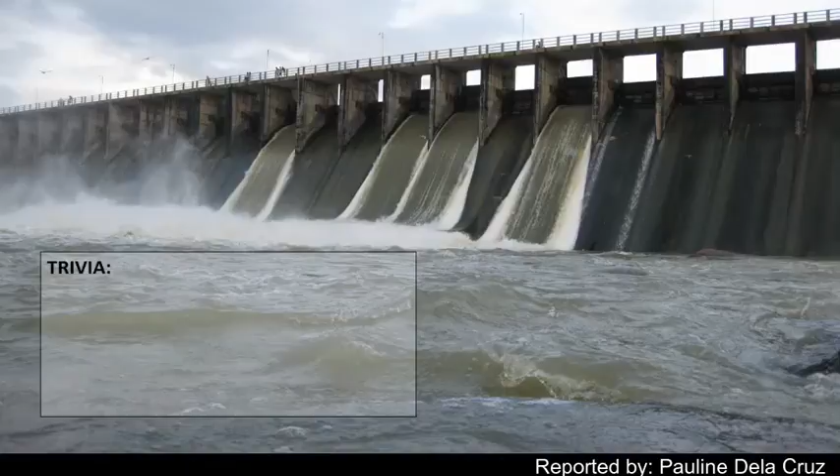First is, sabi dyan, the ancient Egyptians built the first known dam to exist. Yung mga ancient Egyptians po, sila po yung kauna-unahang nakapagtayo ng dam sa buong mundo. Hindi naman po lingid sa ating kaalaman na sila talaga yung mga pasimuno pagtungkol sa mga constructions. Hindi pa man nauso yung mga architecture, yung mga engineers, meron na sila. Ito daw po ay nagawa, yung kauna-unahang dam, around 2,950 to 2,750 BC.

Pangalawa po is the Philippines have 15 large dams, according po iyan sa the International Journal on Hydropower and Dams. So meron po daw tayong 15 large dams dito sa Pilipinas. At ang last trivia natin is, one of the largest dams in the Philippines is the Magat Dam. Itong Magat Dam is located dito sa Luzon, somewhere in Isabela sa Cagayan Valley, Region 2 siya.

So dako na tayo sa kung ano nga ba ang dam o ano yung naitutulong nito sa atin. Dams are barriers usually constructed across a stream channel to impound water. Dams are typically provided with spillway systems to safely pass a broad range of flows over, around, or through the dam. Ibig sabihin, ang dam ay nakakatulong para mapigilan ng tuluyan ang pag-agos ng tubig. Kasi imagine, wala tayong dam, posible na lumubog yung mga karatig na lugar na talagang malapit sa dam. Kung iniisip natin na ang dam ay just a barrier na pumipigil sa pagbaha, hindi lamang iyan. Marami pang benefits tayong makukuha doon at mamaya maidi-discuss natin yan.

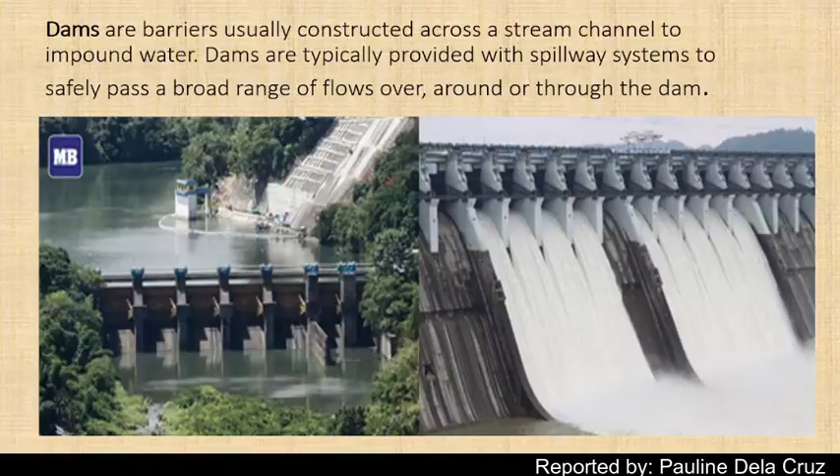Let us now discuss the uses of dams. First, we have irrigation. Major portion of water stored behind dams is withdrawn for irrigation. They are mainly used for crops, livestock, or plantations. Next, we have electrical generator. Water from dams can produce electricity. When the water is released through the dam, it spins the turbine that is connected to a generator that produces or generates electricity. Next, flood control or flood prevention.

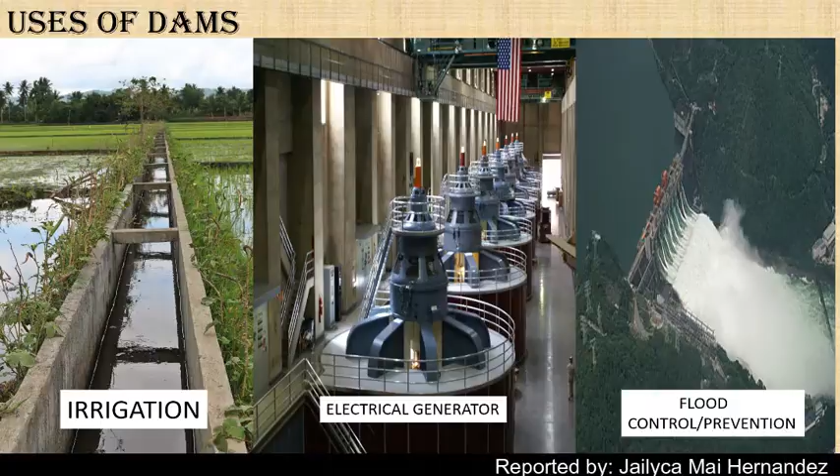Dams are made to protect against the potential loss of life and property that can be caused by flooding. Dams protect by collecting and holding water. But once they are collected, a dam might release the water back into the river at a controlled speed, or it may divert the water somewhere else for other uses. Next, we have water storage or water supply. Dams play an important role in the water supply for domestic, agricultural, industrial, and community use. Water that is stored in the dam can be used during dry season or during times of shortage.

Next, we have debris control. Dams provide enhanced environmental protection, such as the retention of hazardous materials and detrimental sedimentation.

Next, we have recreation. Dams are built for more than one purpose. Dams can also provide recreational activities, such as swimming, boating, and fishing.

Next, we have mine tailings. Tailing dams are used to store water and waste that come as byproducts from the mining process. It allows the mining and other processing of vital minerals while protecting the environment.

And lastly, navigation. Inland navigation refers to the transport of ships through inland waterways. There are various water conditions, such as changing rivers due to sedimentation and erosion. To overcome those kinds of problems, dams are built and they effectively serve the function of controlling the water level, as well as changing the course of waterways.

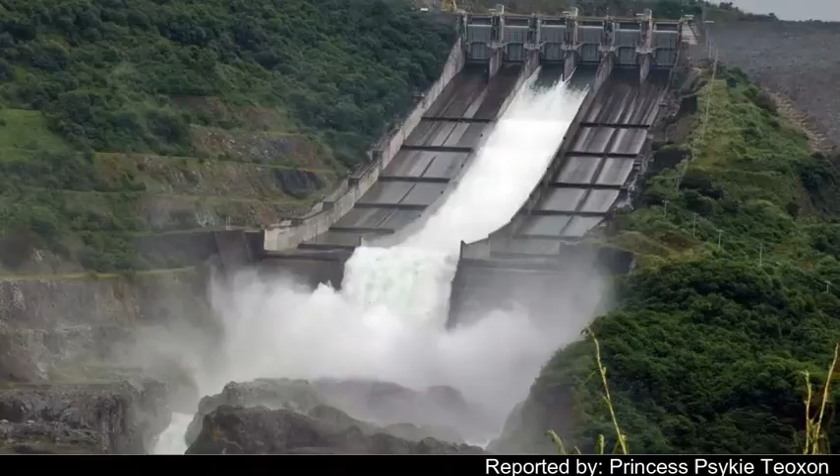Types of dams. We have by structural, by use, and other types. First, we discuss by structural.

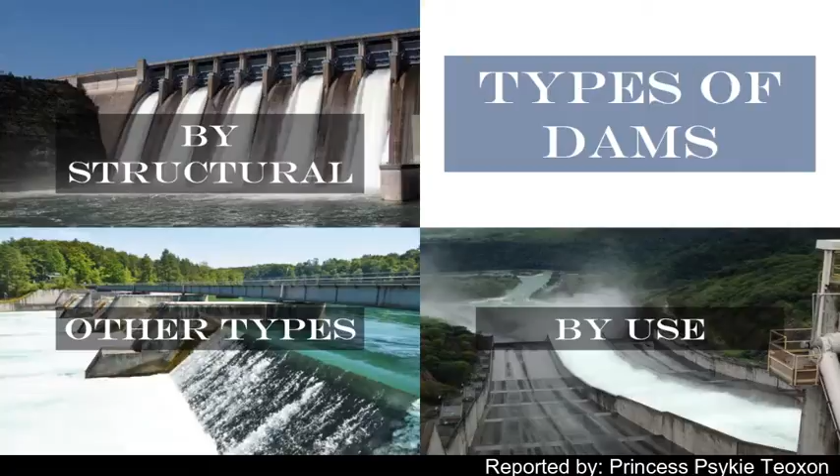Arch dam: a concrete or masonry dam which is curved upstream so as to transmit the major part of the water load to the abutments. It uses hydrostatic pressure to transfer the force of water to the foundation and abutments of the dam. The force of the water on the fill side pushes against the arch and the resulting resistance to bending transfers the loads to the abutments. Next, gravity dam.

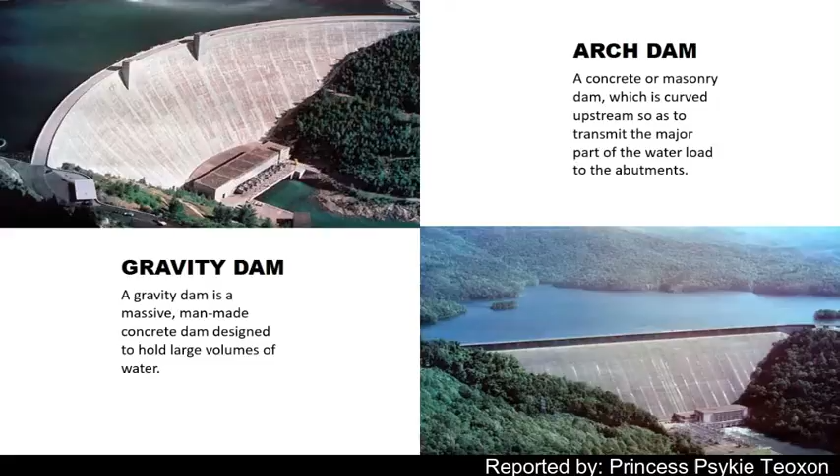A gravity dam is a massive man-made concrete dam designed to hold large volumes of water. Because of heavy concrete use, it is able to resist the horizontal thrust of the water, and gravity essentially holds the dam to the ground. They are used to block rivers in wide valleys and must be built on a strong foundation of bedrock.

Next, buttress dam. Buttress dams can take many forms, but they all consist of a sloping deck supported by intervals of buttresses. There are three main buttress dam types, including multiple arch type, massive head type, and deck type. Buttress dams usually use less concrete than other dams but are not necessarily cheaper.

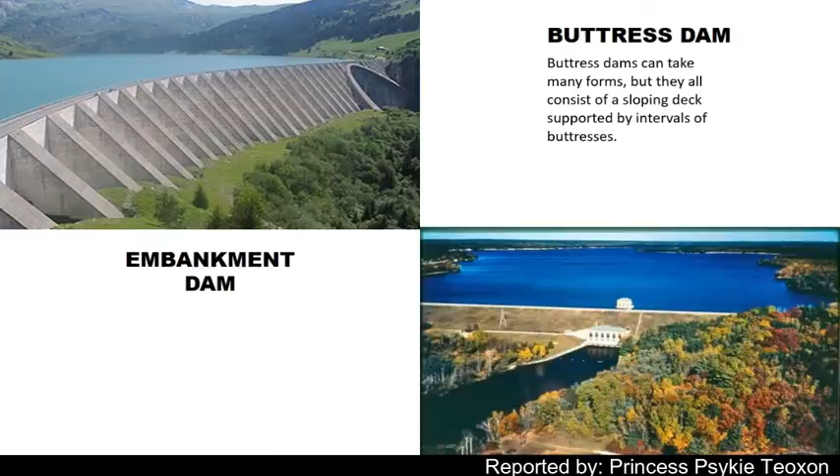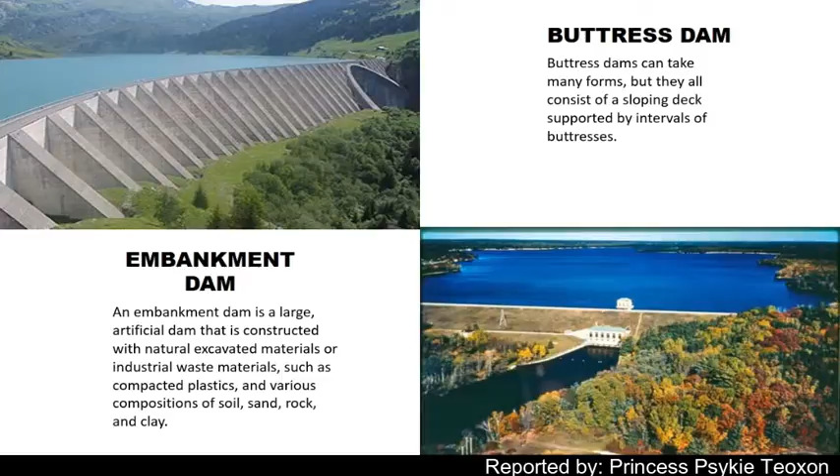Next, embankment dam. An embankment dam is a large artificial dam that is constructed with natural excavated materials or industrial waste materials, such as compacted plastics and various compositions of soil, sand, rock, and clay.

By use: saddle dam, a subsidiary dam of any type constructed across a saddle or low point of the perimeter of a reservoir.

Diversion dam. A diversion dam is used to divert water. They provide pressure to push water into ditches, canals, or other areas used for conveyance. Diversion dams are typically lower in height and have a small water storage area upstream.

Next, underground dam. Used to trap groundwater and store all or most of it below the surface for extended use in a localized area. In some cases, they are also built to prevent salt water from intruding into a freshwater aquifer.

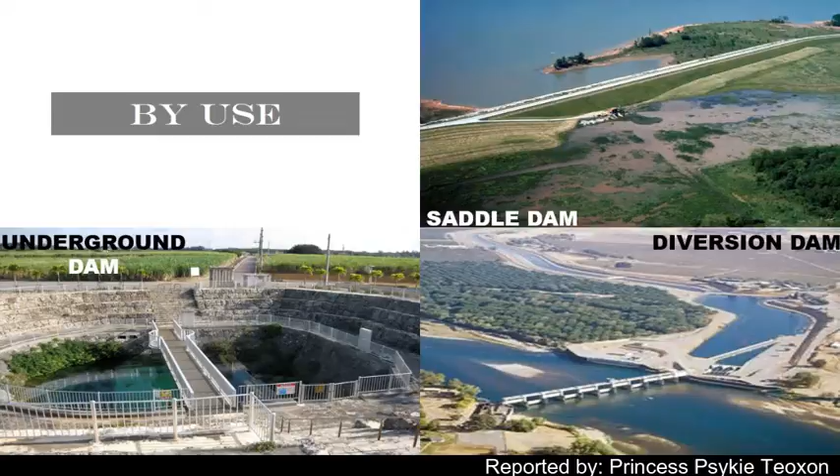Next, other types. First, cofferdam. A cofferdam is a temporary portable dam used for a variety of projects including bridge repair, shoreline restoration, pipeline installation, and many other construction projects.

Hydropower dam: a dam that uses the difference in water level between the reservoir pool elevation and the tailwater elevation to turn a turbine to generate electricity.

And last, industrial waste dam. An embankment dam usually built in stages to create storage for the disposal of waste products from an industrial process. The waste products are conveyed as fine material suspended in water to the reservoir impounded by the embankment.

So next, let's talk about how a hydropower dam works, even just the basic principle. First, we need water, the water reservoir, because of its potential energy. And that water will soon travel into a penstock, which is this—the steep passage of water going to the turbine.

Due to the force of water, the turbine will start to rotate the shaft that is connected to a generator, which is this, going to our generator. By this, mechanical energy will convert into electricity. And after gaining electricity, the current will travel into a transformer so that the voltage of the electricity can be raised, to maximize the energy we get.

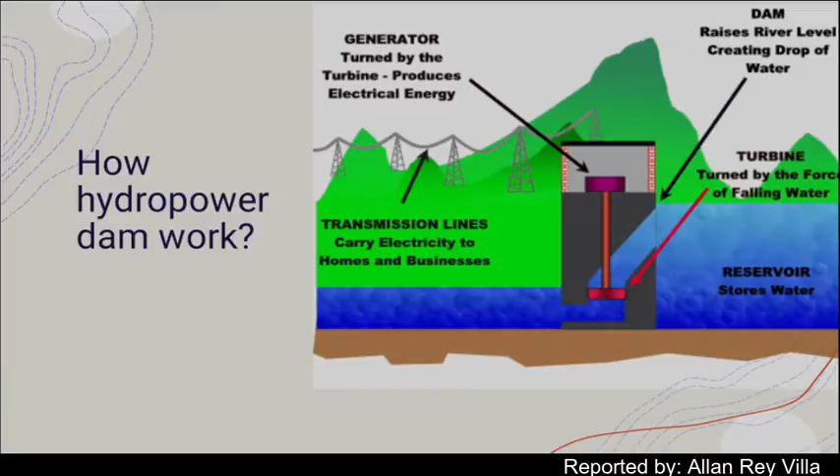And there we have it, that's the basic principle of a hydropower dam. We now have renewable energy ready to distribute into our community. Next, we'll talk about the structure of a dam.

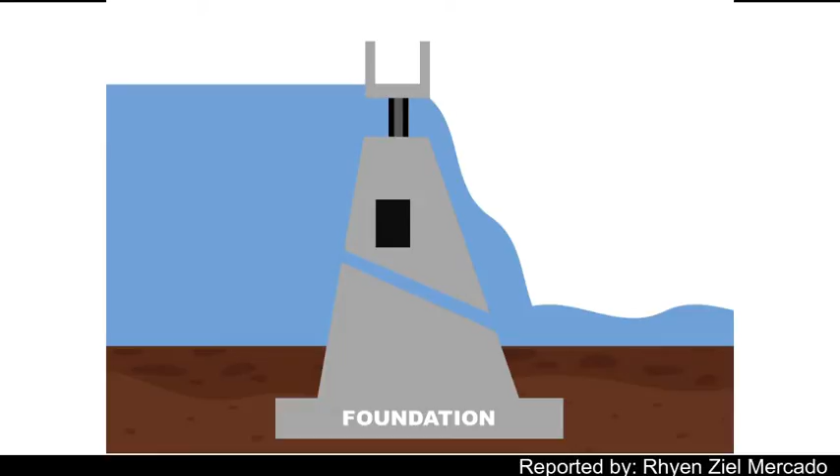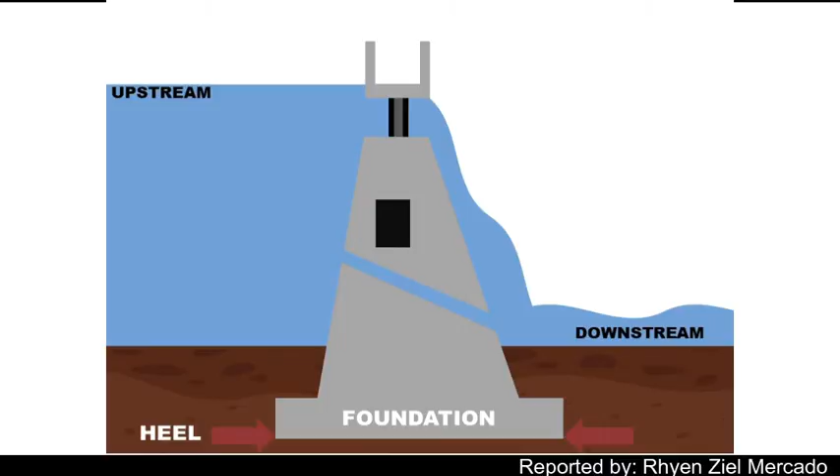As you can see on your screen, this is the cross-sectional view of a dam wherein this side is called the upstream side and this side is called the downstream side. At the foundation of the dam, there is a heel associated with the ground on the upstream side, and on its opposite side, associated with the ground on the downstream side, which is called the toe.

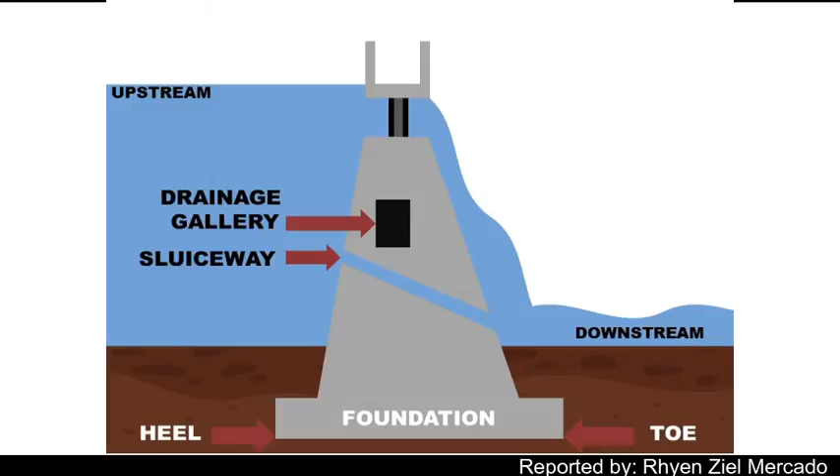The next one is the drainage gallery. This is a small room or pathway which has access into the interior of a dam.

Next is the spillway. Actually there are two types of spillway. In this view, you can see that this one is the principal spillway, and this is the main spillway. The other type is called the emergency spillway, which we'll see in the next slide.

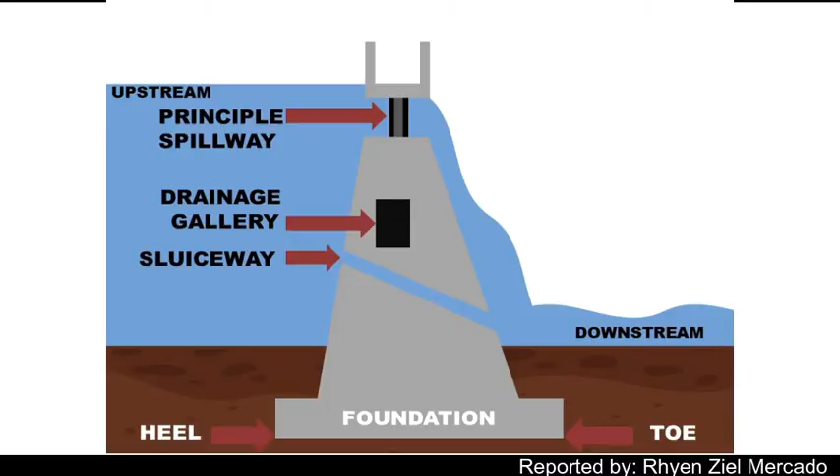The emergency spillway is S-shaped, forming a curve for the purpose of preventing the water from rushing out, which may damage the downstream area near the bottom of the dam.

Next is the crest. This one is located at the topmost of a dam, and this is the overflow part of a dam. Next is the parapet wall.

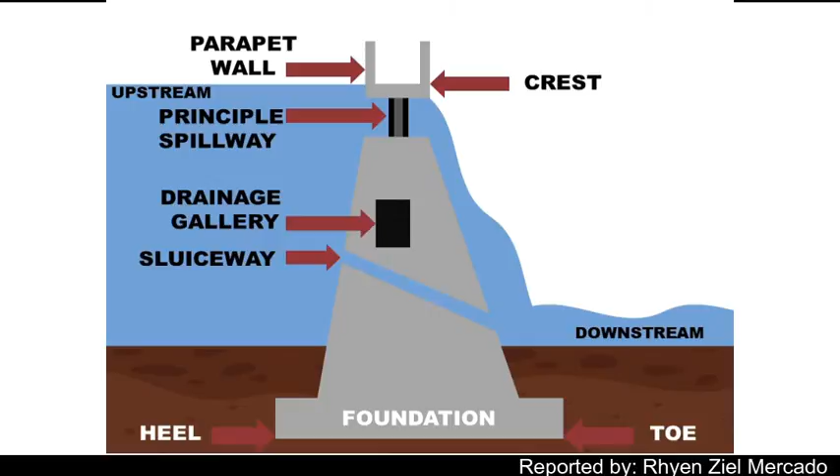This is built for the protection of the people. And next is the roadway, which is assigned for vehicles.

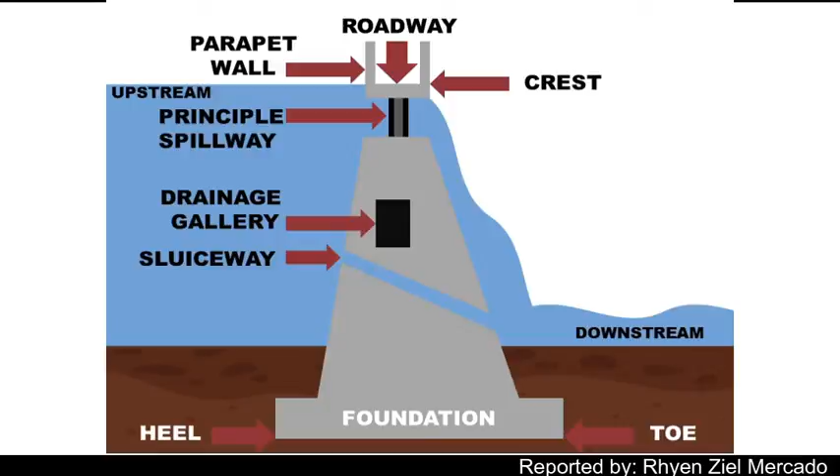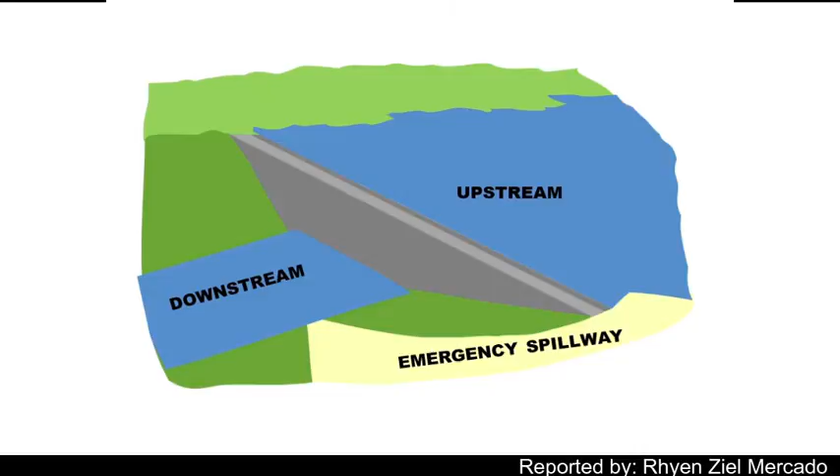In this view, you can see the upstream, downstream, and the emergency spillway discussed a while ago. There's also another part, which is the abutment. The abutment is where the dam rests, and it is located at the sides of the valley.

There are other parts of a dam that may not be visible on the images I've shown you. One of them is the appurtenances. These are some equipment in a dam such as gates, pipes, and others. And lastly, the powerhouse, where the generators are located.

So that's all for the structure of a dam. Thank you.

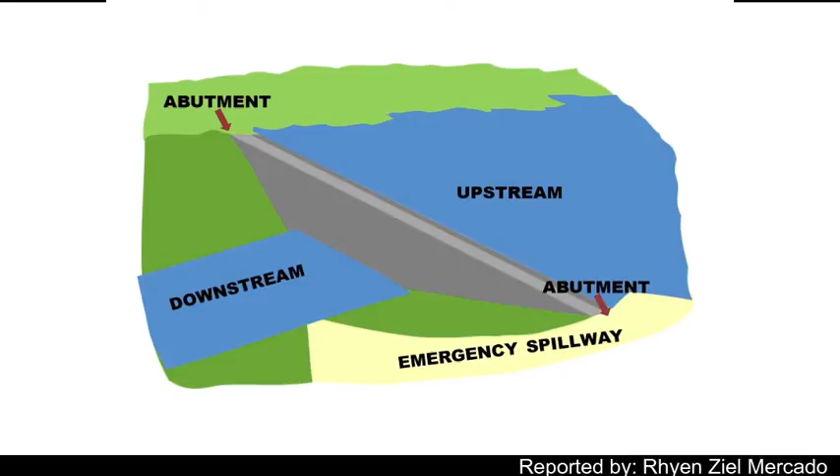The benefits of dams: dams provide hydroelectric power. Hydroelectric power is a renewable energy source that generates electricity in hydropower plants by using water stored in dams and flowing through rivers. The flowing water drives the blades of a turbine, which spins the generator, turning the turbine's mechanical energy into electrical energy. Hydroelectric power contributes to a large portion of global electricity generation.

Next, dams also provide better irrigation. A dam generates a reservoir that may be utilized as a great source of water, particularly for agricultural and industrial purposes. Dams have been utilized for irrigation for ages.

The next one is dams can also control flood. Flooding may be devastating for many places, particularly if neighboring water supplies are difficult to manage. Dams can divert water to other locations, keeping towns safe or allowing additional land to be developed. Flood control dams are designed to reduce flooding by impounding water and safely directing it to other locations.

The next one is dams can provide better navigation. Dams may store water and reduce the flow rate by raising the water level upstream. This makes it easier for ships and boats to navigate, and it permits rocks and sandbanks that were formerly exposed or in shallow water to become fully hidden.

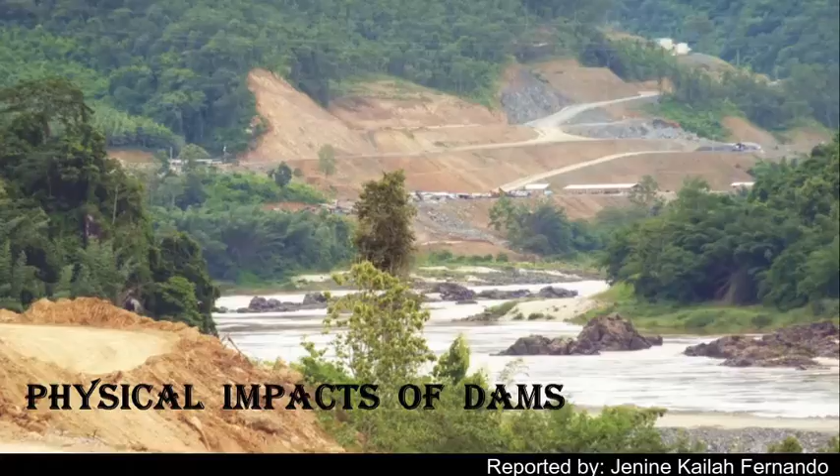Let's move on to the physical impacts of dams. Earlier we reported the benefits of dams, since dams can store water and dams can also prevent flooding, but at the same time, dams also have negative effects.

The first one is habitat destruction. When dams are being constructed, marine living things will lose their habitats, which can result in reducing fish populations, but the worst possibility that can happen is extinction.

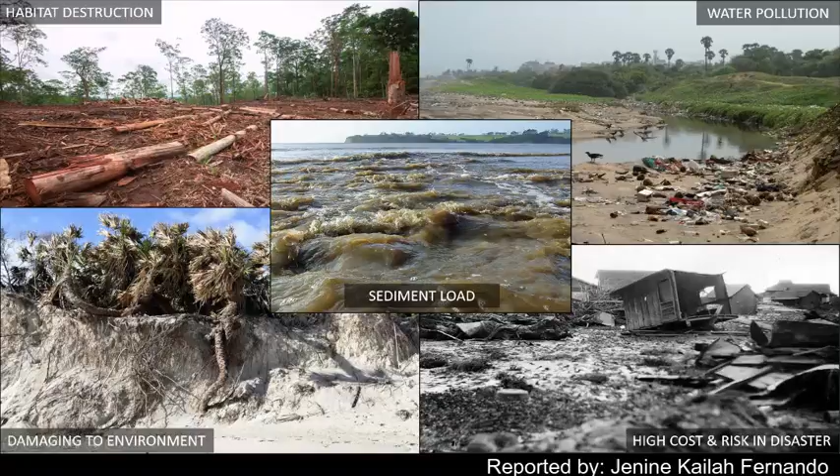Yung panglima, sediment load. Nag-o-occur ito kapag yung water nag-flow sa dam, nagka-create ng spot para sa sediments at matatrapan yung sediment. Kapag natrap yung sediment, malaki yung possibility na it can pollute the water and the ecology of the water environment ay ma-disrupt.

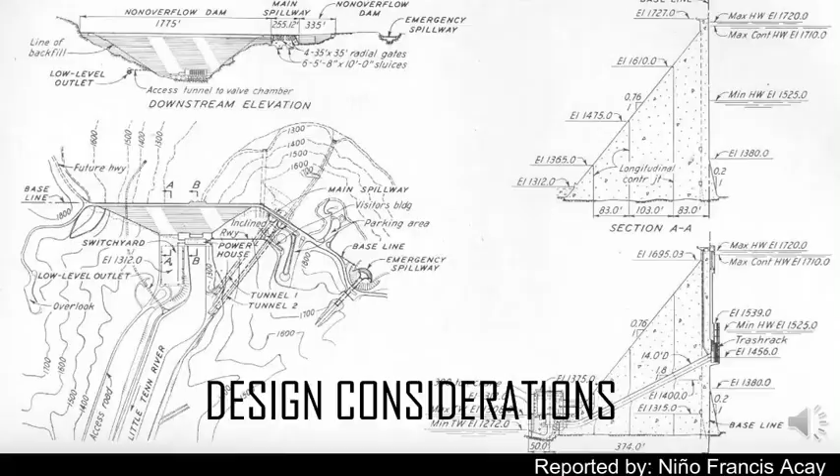Next one is design considerations. There are many things to consider in designing big structures like dam. Due to its environmental and economic effect, dams are carefully designed in order to serve its function, and geological condition and other important factors are the first ones to consider to have a safe and fully functional dam. So here are the things to consider.

The first one is topography. The initial option of dam type is dictated by topography, since ideal conditions are rare in the uneven terrain that dam sites usually encounter. A concrete overflow dam would be suggested by a small U-shaped valley, like a narrow stream flowing between steep rocky walls, or an earth-filled dam with different spillways would be appropriate in a low-plain area. Or, in a small V-shaped valley, the choice will be an arch dam.

Next is geology and foundation condition. Because the foundation must bear the weight of the dam, it should be extensively investigated, since rock structures may directly damage the dam, especially if there is a presence of joints, highly folded rocks, and other structural features underneath it.

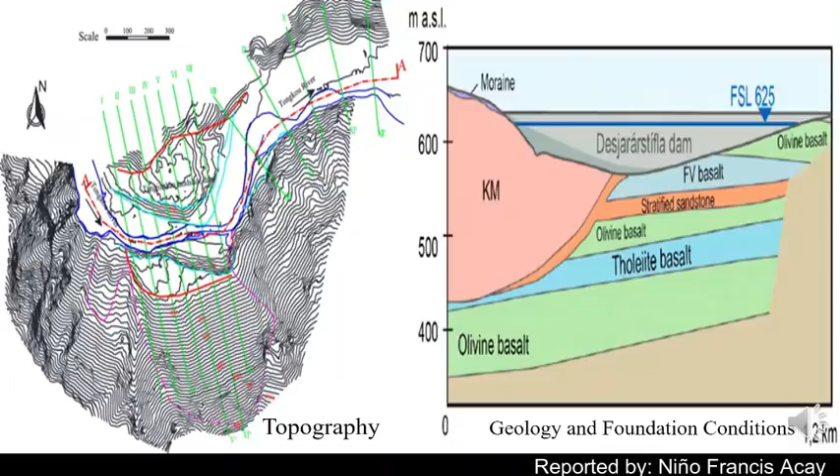Next is availability of material. Another key consideration when choosing a dam type is the availability of material. The materials necessary for dam building must be accessible locally or within a short distance of the building site in order to ensure cost effectiveness.

Next is spillway size and location. The extra river discharge is disposed at a spillway. The spillway's capacity will be determined by how severe the floods are that will be bypassed. On rivers and streams with high flood potential, the spillway is consequently considerably more crucial.

Next is earthquake zone. Ideally, dams should not be built on an earthquake zone, but if so, it must be highly engineered and designed to withstand seismic forces. Earthen dams and concrete gravity dams are structures most adapted to withstand earthquake shocks without posing a threat.

And lastly, height of a dam. Height of a dam may vary. For a height exceeding 30 meters, earthen dams are normally not suitable. Gravity dams are usually selected at higher or greater heights.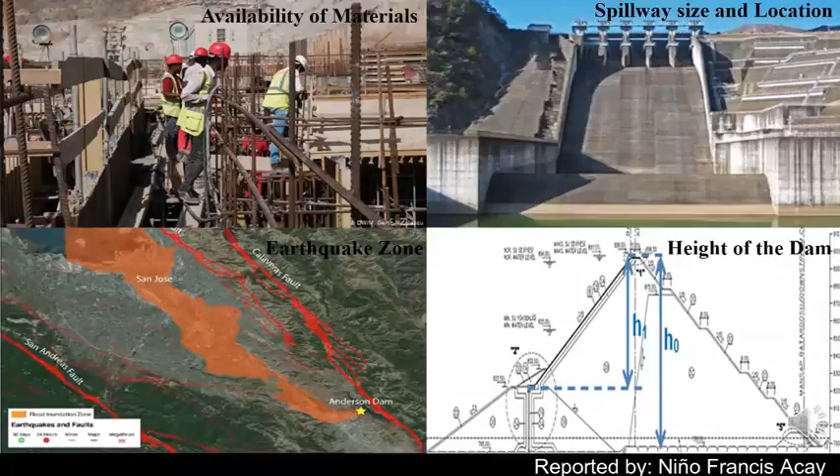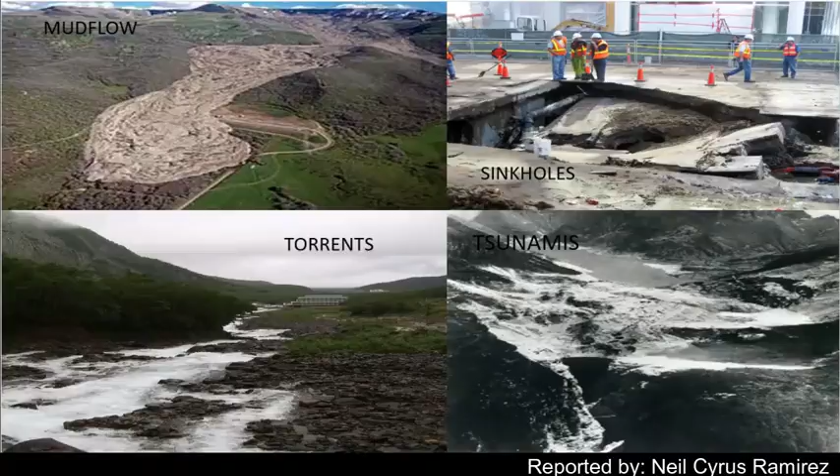Geological hazards. We have different geological hazards that may occur in our dams. Examples of this are mud flows, torrents, ground settlement due to consolidation of compressible soils or due to collapsible soils, ground subsidence and sinkholes, overtopping in dams, tsunami because of the destruction of our dams, earthquakes, landslides, and mountain collapses.

In conclusion, a dam is needed to help us in our everyday life. If it weren't for dams that are built, we wouldn't have clean water to drink and use for our baths, irrigation, and many other things that need water. Building dams indeed made our life easier.

Thanks to these dams, we are able to maintain water flow and to always have water coming from our faucets when needed. We are able to drink clean water and avoid extreme floods. We hope that you were able to understand and have learned a lot from this topic, the types, benefits, use, and need of them.